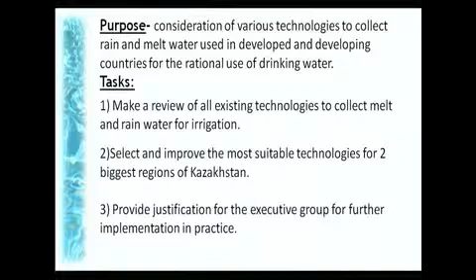The main purpose of our project is to consider different technologies for collecting rain and melt water in different countries. Here are the tasks: first, to review all existing technologies to collect melt and rain water; second, to choose the most appropriate technology for our region; and third, to provide justification for the executive group for further implementation in practice.

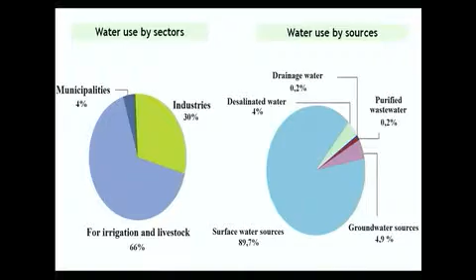If we consider water used by sources, almost 90% of water comes from surface water sources, which in many cases is fresh water. One of the problems of mankind now is that we use this fresh water not for crucial points.

For example, for drinking, for cooking, and also for personal hygiene. But we use drinking water sometimes just for washing cars, watering gardens, and similar uses. This means we use it inefficiently. In order to reduce the consumption of drinking water, we consider the use of alternative sources such as rain and melt water for the needs of each household.

Technology to collect melt and rain water has been known since ancient times. For example, in Asia and Africa, it was widely used. Now it is widely used in both developing and developed countries. The main idea is to collect water from the surface into special tanks. Nowadays, all technologies aim at obtaining more pure water using different filters.

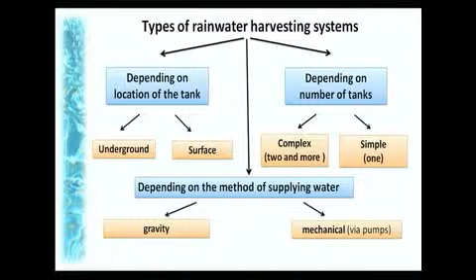Here we can see the types of rainwater harvesting systems. Depending on the location of the tank, it can be underground or surface. Depending on the number of tanks, it can be complex, with two or more, or simple, with just one. And depending on the method of supplying water, it can be gravity-based, self-flowing, or mechanical, using pumps.

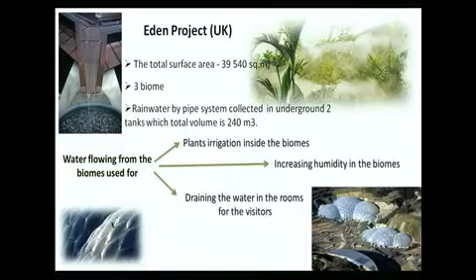One bright example of a water harvesting system is the Eden Project in the United Kingdom. This project is a chain of several glass houses consisting of three main biomes. Each contains several different plants from different parts of the world. Under these biomes are two main tanks with a total volume of 240 cubic meters. One interesting thing is that since the harvesting system started working in 2007-2008, they have cut water consumption by 20%.

Water from collecting goes for three main purposes: first, for irrigation of the plants; second, to maintain humidity at a certain level; and to supply water for the rooms of the visitors.

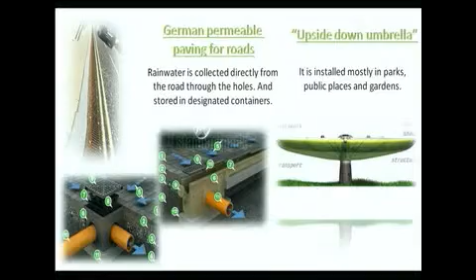Another nice example of using this technology is German permeable paving for roads. After the rainfall, the water goes through the paving into special trays, and then into special tanks. This water is usually used for watering the pavement and the roads.

Also, one interesting example is the upside-down umbrella. This is a unique design example for collecting water, especially in parks and gardens. This umbrella acts like a surface for water harvesting.

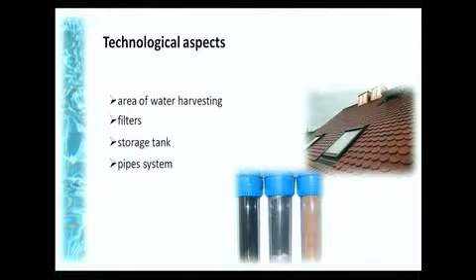In our presented technologies, it's really important to see the technological aspects. It consists of area of water harvesting, filters, storage tanks, and pipe system. The area of water harvesting can be free of harmful components such as lead and copper, and in many cases it can be created from natural materials such as tile. Filters can be as simple as complex. Storage tanks can also be free of harmful components, and the pipe system can be made from polypropylene.

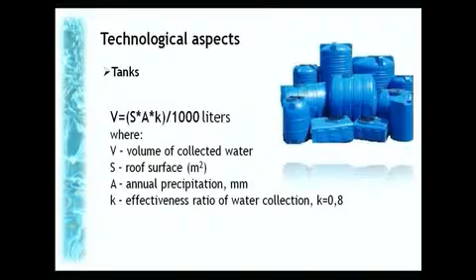For the tanks, the main point we need to consider is the capacity of the tank. We can find it by using this formula, which you can see on the slide. It consists of roof surface, annual precipitation, and effectiveness ratio of water harvesting.

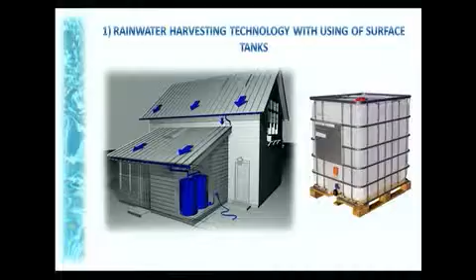System number 1 is rainwater harvesting technology using surface tanks. This technology is appropriate for a region with medium precipitation. After rainfalls, water goes by roof to a special tray, and by pipe system it goes to tanks. It can be one or more. And if we want a low cost system, we can use secondary material tanks.

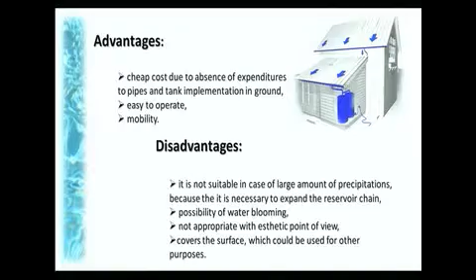This system has advantages and disadvantages. The main advantage is that we can change the capacity of the tank by elongating the chain of tanks. The main disadvantage is that in many cases the tanks can take a lot of place on the surface.

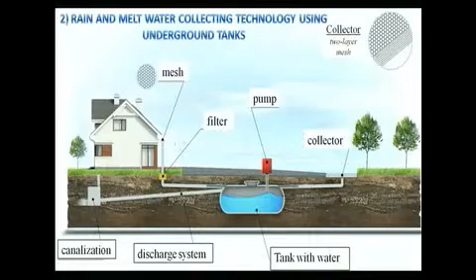The second system is rain and melt water collecting technology using underground tanks. This system is more complex than the previous one, and here we have two sources of water: snow and rain. And of course two surfaces, the yard and the roof. The yard can be installed under a special angle which directs the flowing water to the collector. Above the collector, we install a special net for collecting debris. In this system it's really important to have filters.

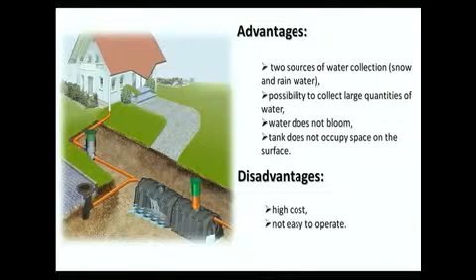The main advantage of this system is that we have a big capacity of collecting water, and the main disadvantage is that we need special service, and also this system is not easy to operate. It will be better to install the system before starting the foundation of the building, but in many cases we can install it in already built houses. However, the price of this system can be higher and not so appropriate for the design of the yard.

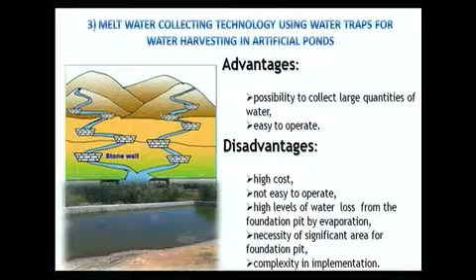Melt water collecting technology using water traps for water harvesting in artificial ponds. This system is more appropriate for mountain regions with medium to high precipitation. After melting, water goes through traps and eventually reaches the pond. This system is very appropriate for our region because in many regions of Kazakhstan we use a drainage system for irrigation, and the pond can act as a source of water.

The main advantage of this system is the big capacity of water, and the main disadvantage is that it's hard to operate and has high cost.

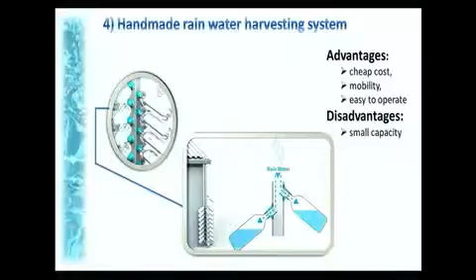Handmade rainwater harvesting system. This system is simple and can be used as an addition to the previously mentioned systems. It consists of a main pipe made from polypropylene, with bottles fused to this main pipe. The capacity of the bottles can vary.

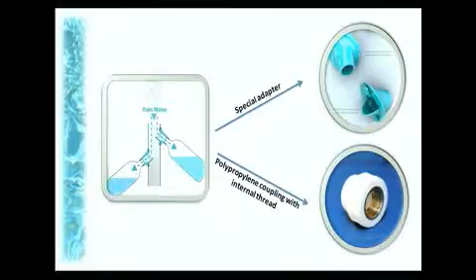The point is how to fuse these bottles to the pipe. We have two ways: we can order a special adapter from the inventor of this system, or we can use a polypropylene coupling with internal thread. This is the idea of our team - we can just use this coupling with internal thread attached to the main pipe.

Economic feasibility of the water collection system, of course, depends on many points. The first one is the quantity and quality of water available from other sources, which means, for example, in Kazakhstan we have different costs of water - in some regions it's high, and in some regions it's low. So if the region has a high cost, it's more appropriate for using this technology, but if the cost of water is low, it's not so easy.

Also, it depends on household size. Choosing one of the four systems depends on this point, because if you have a big surface, you can harvest a lot of water, and if you have a smaller surface, you can collect a smaller amount of water. For a big capacity or big surface, you can choose the system with a big capacity, such as the system with underground tanks.